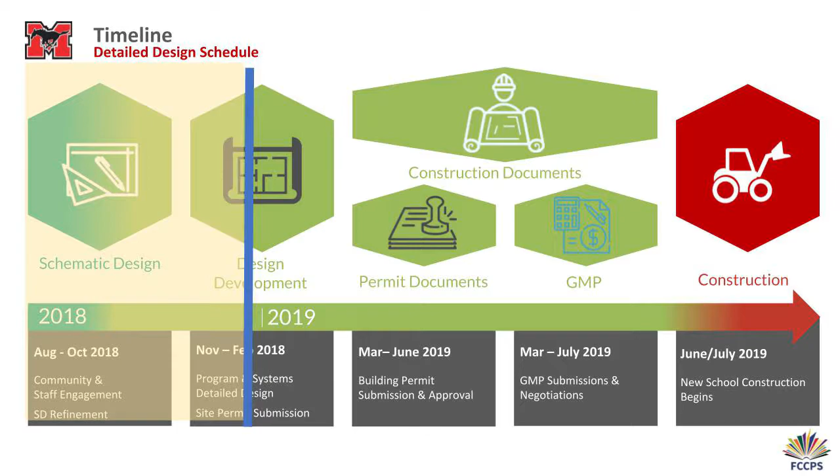Now as we get into design development, this is the time we're really digging in with our teachers. We've held about 20 meetings at the high school so far, talking about what the classrooms will really look like: how much linear storage space is needed, where some of the casework might go, where the front of the class would be, where we see technology going, and exploring further what classrooms might look like, since we've gotten the geometry of the school correct at this point.

So we've got the exterior, and now we're starting to really look at what happens inside the building. Those conversations with our teams of teachers have gone really well, and they've given us good feedback. We've made modifications and adjustments based on that feedback regarding where some walls are and how we might utilize the space more effectively and efficiently.

We're hurtling toward the end of design development and also site permit submission. The Gilbane, Stantec, Quinn Evans team will do their permitting submission on January 1st — I think it's January 3rd or 4th when they'll actually put their site plan submission in. We're really excited about that. During that time, over the winter holiday break, we'll step away from this a bit to regroup and catch our breath.

As we come back, we're going to dig right back into design development, continue with those meetings with the team. Then we'll get into the March and June timeframe, and that's when we start talking about construction documents. We've gotten the schematic right, we've gotten the design development right, and now we're moving towards construction documents.

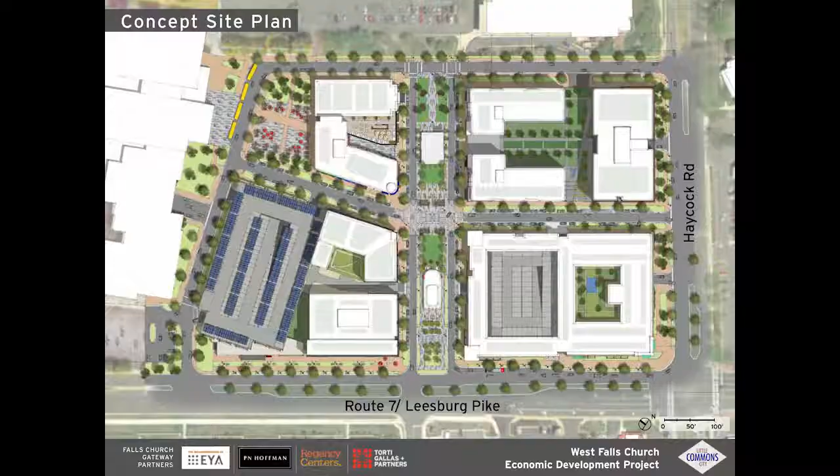How many of you have seen the site plan already from the news or looking things up? Okay, so about a quarter of the room. So for a bunch of you, this will be new.

This is the economic development site. It's about 10 acres. The school site is right here—Mary Ellen Henderson is sitting right here, and the new high school up there, Leesburg Pike and Haycock Road on the far right. There were a few key constraints as we started thinking about how to design this site to meet the needs of the city from a tax revenue perspective, from the type of development they wanted to see, and to be careful about not introducing too much residential because of concern about overcrowding in the schools.

For example, our first plan was, we can give you a lot more money and just build townhomes, but there was a concern about how many kids that would generate for the schools. So that had a lot to do with where the site ended up.

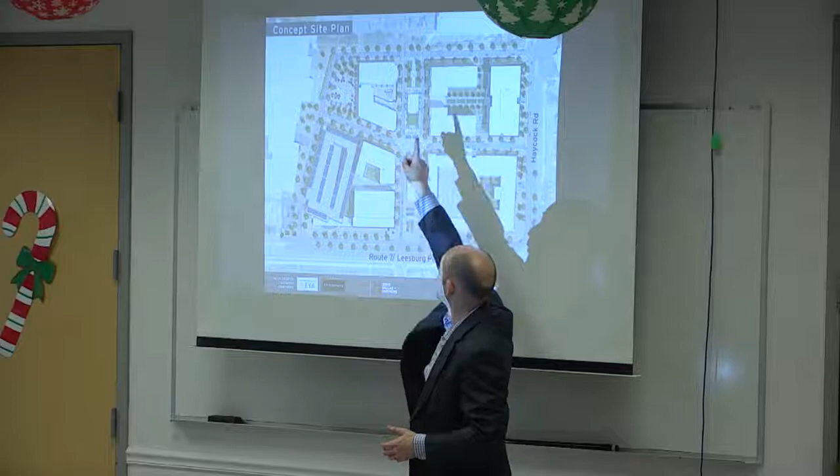One of the major issues on the site is there's a lot of grade. As you drive up Route 7, you probably recognize there's a hill as you get to the top towards the high school. It's about 26 feet from here to here, which is about 2.5 stories of a building—quite a bit of grade. So one of the first things was, how do you create a great flat retail main street that people can stroll and feel comfortable on, that can be handicap accessible? That governed creating that retail street in that location.

One of the initial ideas, before we got the topographic map showing us the kind of mountain the site's on, was to have a retail street running east-west towards the school, connecting to the Federal Realty Shopping Center to the right. But that would create a situation where you'd be walking up a hill along the retail—you wouldn't be able to have outdoor cafes, and the individual retail pieces would be sloping up the street, which makes it hard for tenants to have flexibility on how big they want to be.

And so having a flat retail main street is really critical. So that governed the location.

The second piece was this goal to try to connect this development site and the city to the metro. The metro is back there, and it's one of the lesser utilized metro stations in the system. So how do we create, for pedestrians, cyclists, as well as cars, much better visibility and direction towards the metro itself, and make that walk to the metro attractive and nice and appealing so people will be more willing to do it, versus kind of through parking lots. That was a second reason why we directed it this way.

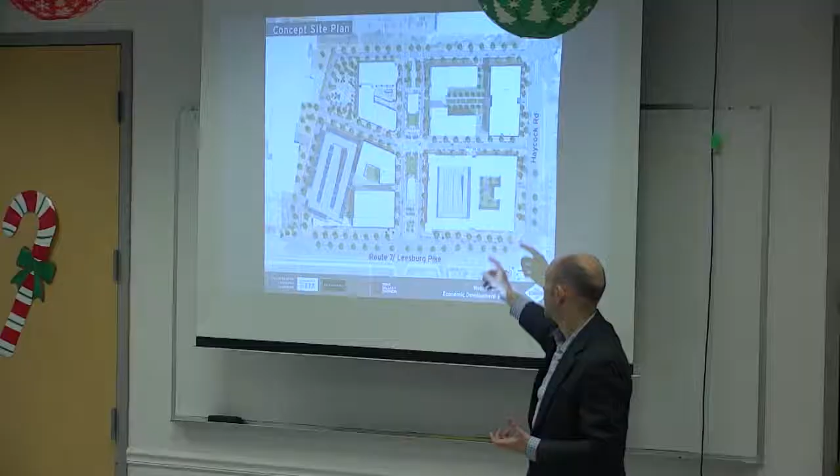A third key issue was there's a desire to have a grocery store in this site, and the logical location for that grocer is right here at the corner of Haycock and 7, where there's the most visibility and where you have a traffic light where cars are stopped and they can see the store. So with a grocery store here, that somewhat dictated the size of that block with the grocery store and parking behind it, and that's why you see that's one of the larger blocks on the plan.

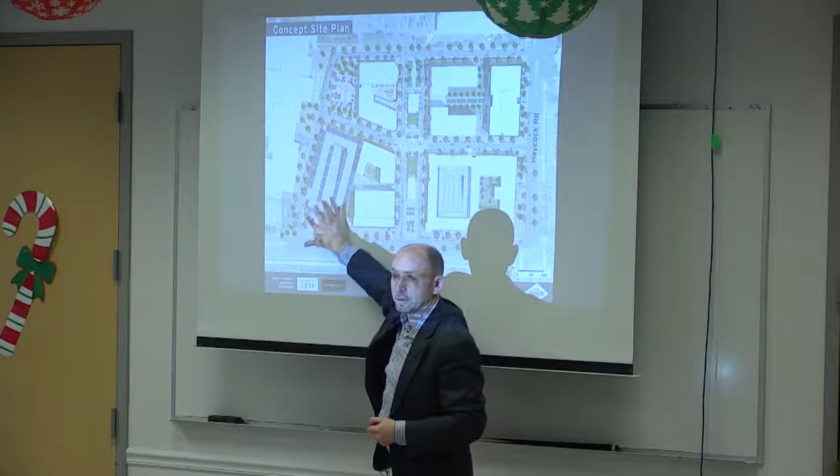The fourth thing was interactions with the school. Originally, if those of you who haven't seen the original plan, the high school had a field here and then a little bit of parking below it. And what that did is it created a little bit of a barrier between the economic development site and the high school, and made it hard to have streets that connected through between the development.

So when the high school selected their construction and development team, one of the changes that came with that was the proposed design from that team, which was to create this really nice plaza in front of the high school entrance and to have this grand entrance gesture to the school. And that opened up the ability to connect our site to that site and really have them work collectively.

And in many ways, it actually informed our retail merchandising strategy for our site. So part of the retail that we'll have on our site will be geared towards high school students, families, middle school students, things that they might want to do directly after school, making it easy for parents when they're doing drop-off or pick-up to also do errands while they're there.

So the retail merchandising strategy here will have, on top of the grocery store, restaurants, coffee shops, but also, one of the tenants that we're talking to is a music school. You can envision a karate studio or dance studios, the types of things that kids might want to do for activities as they leave school, giving them that after-school activity.

The last piece was, and it's really critical, if you're going to create a place, you really have to deliver a lot of it at once. You've probably seen developments over time throughout the region where they kind of go piecemeal, a building at a time. What often happens is that building is never as exciting as people expect it to be, the retail never does as well as they hoped it would be, and then the next building never happens and it sits as a parking lot, and these big planned projects never really come together.

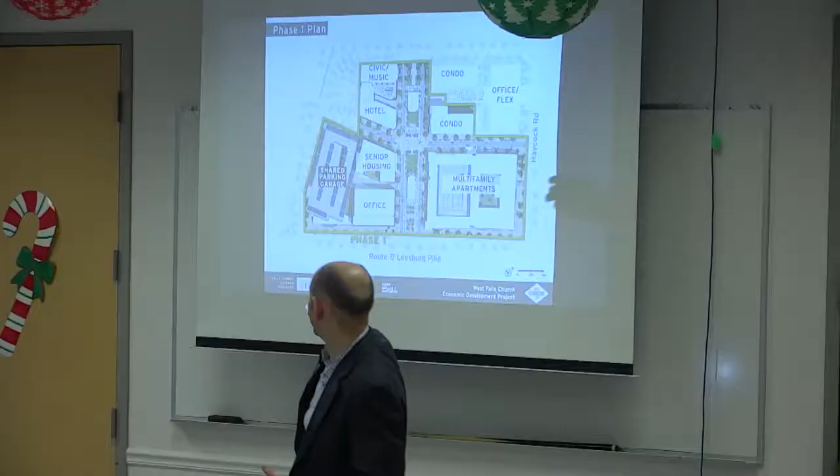And then the last part of that, one of the big features of the site is this central park space. It's 60 feet just in the park that's in the median of these streets, so it's a pretty nice, generous space.

Federal Realty, my prior company, has a few examples of projects they've built, one of which is in California called Santana Row, that's been very successful, where the active median becomes a park, with yoga in the park, music in the park, and festivals.

We have the ability to close down that street and have entrances to the garages from the other streets, so that when you want to have a citywide festival of some sort, we can house that in this area. It really creates kind of an outdoor living room and space for the community.

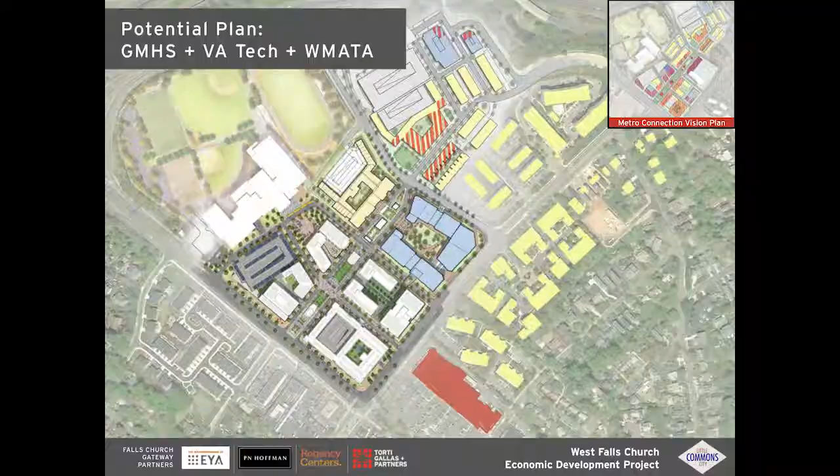Part of this vision also has to do with the connection to the Metro. As you know, the high school site is 10 acres. Next door to you is a Virginia Tech parcel that's 8 acres, and beyond that is a WMATA parcel owned by Metro that's 15 acres. So one of the visions we've been thinking through is how do you connect this site ultimately to Metro.

So that the whole thing feels like it was planned collectively, and so that you have a retail main street that continues all the way from 7 back towards the Metro, making that entire walk a more attractive, safer and nicer experience.

To give you a sense of scale, that 34 acres is about the size of Mosaic District down in Merrifield, so that gives you a sense of how big that property is. But obviously today it doesn't feel like that at all, it's kind of individual separate parcels, but we have an ability to link them together.

Our team is one of 2 finalists for the Virginia Tech parcel. Their idea is to stay on site as of right now and keep academic programs there, but potentially add some student housing, and additional programs or newer buildings. We're working with them to think through that process, and they will hopefully select one of the 2 teams sometime early next year or in the next 6 months.

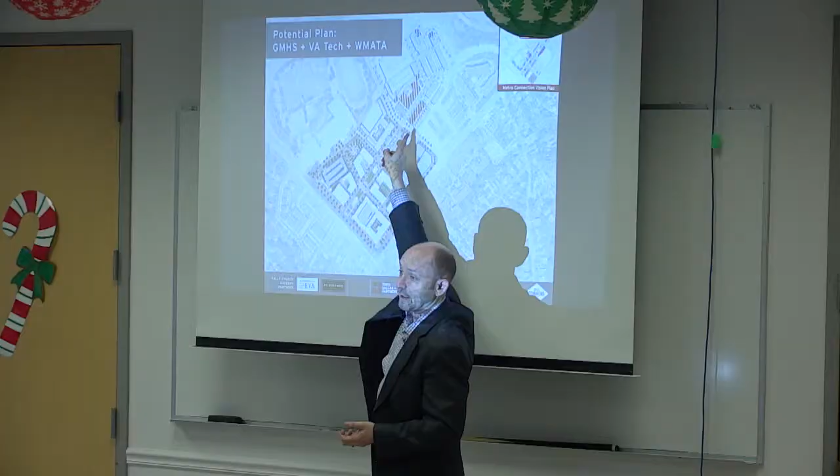What's critical is really creating the street that connects right through the middle, so that pedestrians, bikes, cars have the ability to go all the way back to the Metro without having to come back out onto Haycock, which already, as you know, has traffic today.

Beyond that is the Metro Station property, and the comprehensive plan in Fairfax County calls for fairly lower scale residential development on that parcel, and that's generally what we're showing there, with a little bit of retail to continue that safe pedestrian walk all the way back to the Metro, having stores open as you come home or as you're going to work early in the morning or coming home late at night.

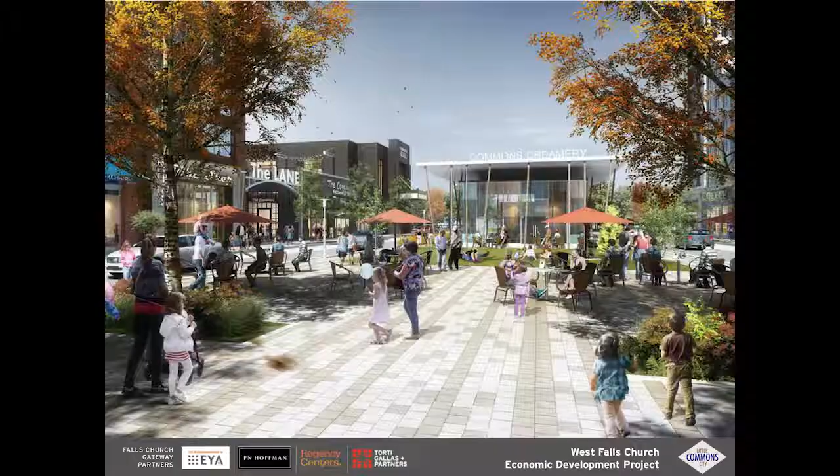And this is an image down inside that park space as well. One of the critical pieces that we're looking at right now is this building right here.

I'll show you where that is on plan. Give me one second, sorry. I realize every time I go in front of it, I'm doing this. I'll stand on this side. There we go, that's better. Only took me 15 minutes to figure out that I should be on this side.

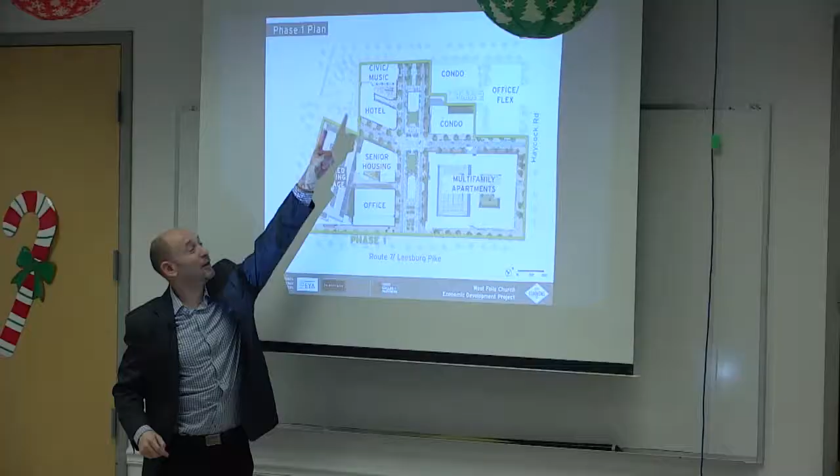So this space up here is the hotel, which is attached to what we're calling the Civic Building, and that's a music venue. The second floor of that building is a music venue with an outside deck of about 4,000 square feet that will have concerts and music.

We had talked with the city about this idea of wanting a large space for events inside the city. So that's a big open room that has the ability to be rented out for parties, rented out for special dinners, and it's connected to the hotel, so people can stay in the hotel on site and have this great room right next door.

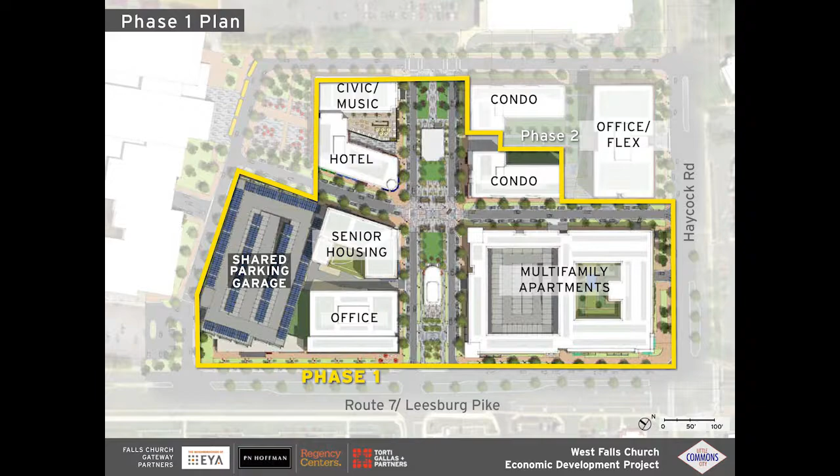On the weekends or evenings, it can also be used for music. On the first floor of that building is where the music school would sit, facing the high school. So there's this nice symbiosis between the music venue, the music school, and the high school, which has a great music department as well. The three of them could work together in concert.

But that view we were just looking at is looking at that music venue in the distance. So it's the second floor of this building right here, with the outside rooftop deck above the retail.

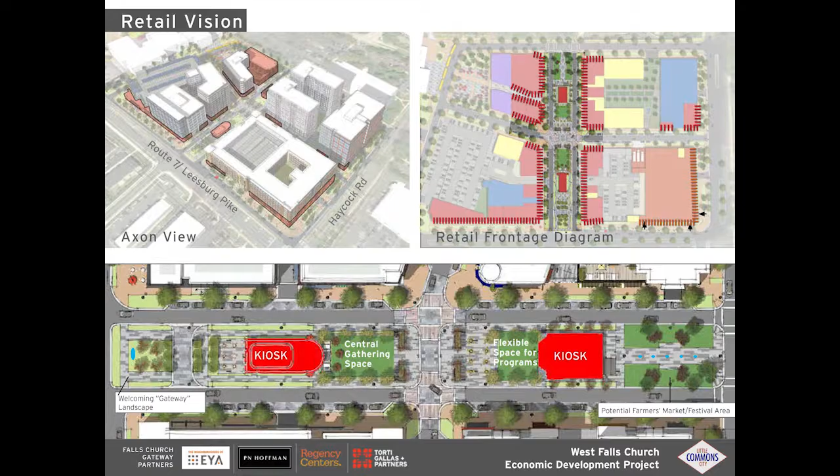A little bit of a blow up of that retail street, the Park Street in the middle. As you can see up on the right, almost all the edges of the site have retail on them. One of the main reasons we do that is so that when you're walking on the sidewalks, it feels safe. You're looking inside stores, it's active, it's well lit. It doesn't feel like dead space. So we've tried to cover almost all the ground level with retail.

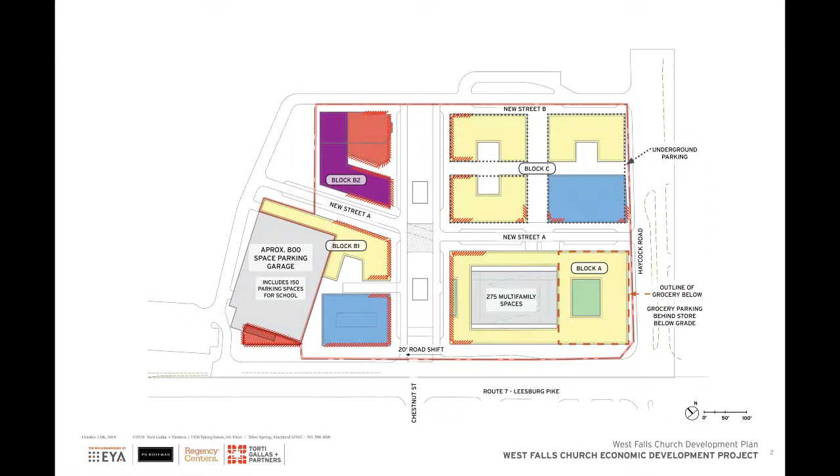As we've continued, this is just a slightly further generation of the plan, obviously not as pretty or rendered yet, but we're continuing to go back and forth with the city and work through the plan itself over the next few months.

This image I'll share, you might have seen on our plan, there's a structured parking garage on what was the school's surface parking lot. One thing we've been talking about with the city and the school board is the idea of having a more efficient, larger structured parking deck there. That would result in a larger payment of land to the city, and it would also give an opportunity for marketing, for art on the buildings, for branding, for the school.

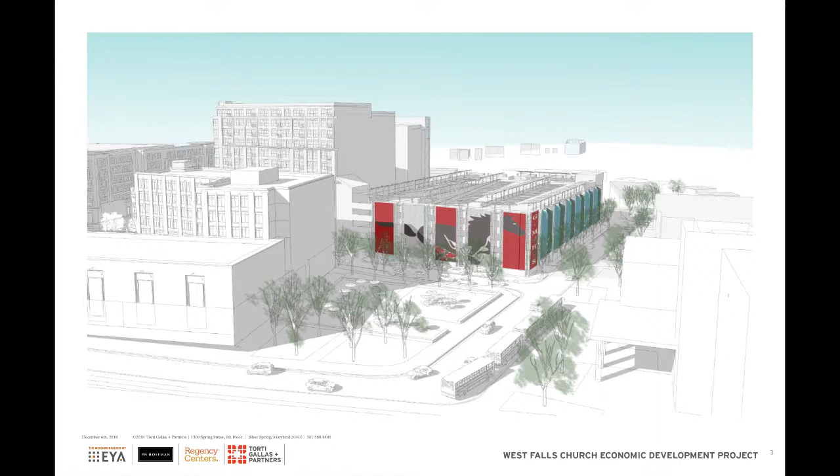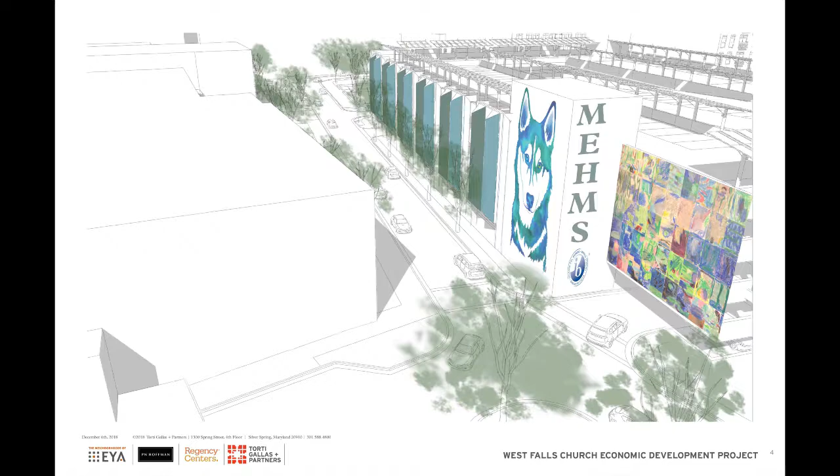And then some early, very early conceptual ideas of doing something on the garages that actually harken back to George Mason High School and to Mary Ellen Henderson. So you can see the Mustang on this side of the garage, and the idea of having a big signpost for the middle school as well.

The next step would be working with the high school's art department to figure out a way to get the kids involved or the students involved in art on the buildings, whether that's an annual tradition of doing some sort of mural or ceramic collage that gets placed on the building, or whatever the art department wants to do. We would want to work with them collaboratively on that idea and really bring the school out into the spaces, whether it's through placemaking we choose, art on the buildings, even the high school plaza, which will have the music school sitting on it. Is there a music theme or some sort of sculpture that makes sense within that park space as well?

And then finally, really why I'm so excited about working with P.N. Hoffman is they have this great track record and history of placemaking. That's kind of my background as well from my time at Federal Realty. Placemaking is kind of the secret sauce behind what makes places feel great.

You go to Rockefeller Center at Christmas time and it's crowded, obviously, but it feels great for a reason, right? Everybody knows the tree, everybody knows the ice skating rink, you've seen it on TV, the landscaping is beautiful, the placemaking there is unbelievable, the art. So as you walk around, you feel like you're transported to another place. And the buildings are actually a beautiful, very simple Art Deco backdrop to what really happens at the street level, which is the most important part of that space.

And so that happens in places all around the world. When you go on vacation, you typically go to places that have great placemaking. Most people don't go to places that are fairly dry and drab. So how do you bring that to new development and make sure that we're creating places that are exciting?

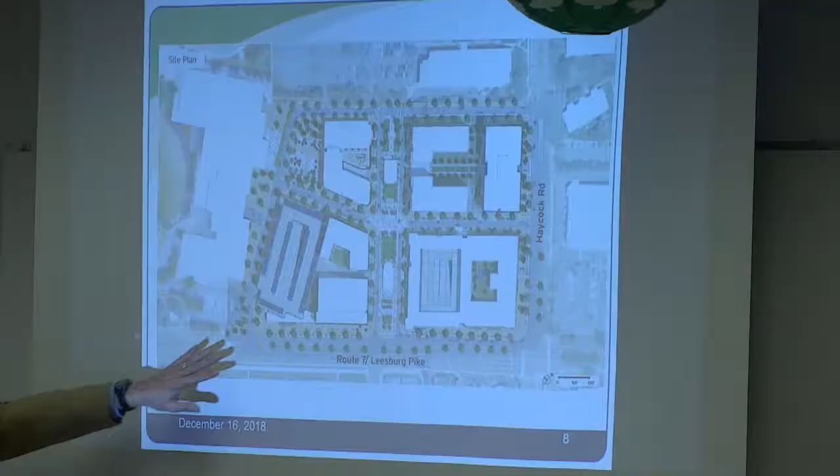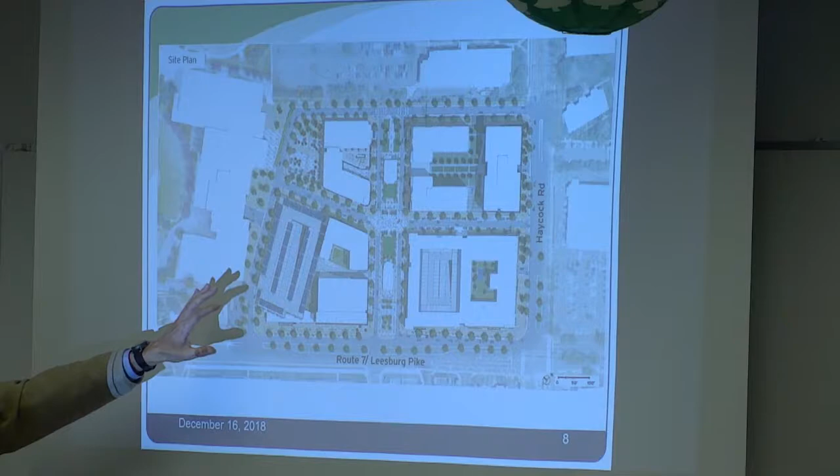So I put this slide back up again. When we're talking about the shared parking, if this option is taken—and that's a joint decision of the city and the school board—then that's what would generate the additional $5.3 million in value. But there are really significant design issues to consider here, and so we need to work those through.

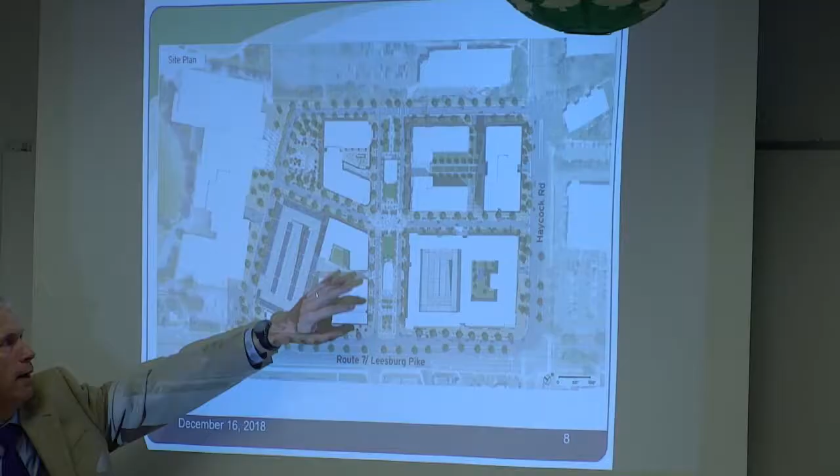Some positives are that this provides shared parking for the schools. It would provide the 187 spaces that the schools had already designated for the ground of this site, but it would also be very convenient for football games or PTA nights, with the surge parking being very convenient and centrally located for the school as well. Otherwise, this parking, during daytime, will serve the office, the senior housing, the hotel, and the music venue.

The next payment is in 2021 when the land is physically conveyed to the development team after the new high school is completed. Then there will be 3 years after that of $7 million each, for a total of 4 years with $7 million payments.

The $3 million CDA plus-up would occur in 2021 if we choose that option. The $5.3 million plus-up for the off-street parking would come in 2023 if we choose that option.

The phase 2 payment of a minimum of $10 million will be either 3 years after completion of phase 1, or 2029, whichever comes first. That's the payment for phase 2. And the capital event fees will be ongoing for the life of the leasehold.